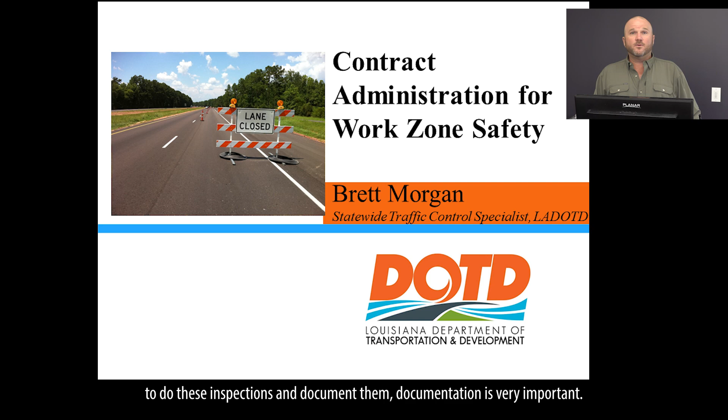So very important to do these inspections and document them. Documentation is very important. We're going to discuss that a little bit later on.

So as far as agenda today, we're going to define a few things in temporary traffic control, what some things are. We're going to talk about specifications. None of this stuff has been made to be memorized. There's specifications written for temporary traffic control. We have our standard specifications manual. We have temporary traffic control standards. We have project specific plans. We have to verify that we're using the correct plan and the correct specification and apply that to our job site.

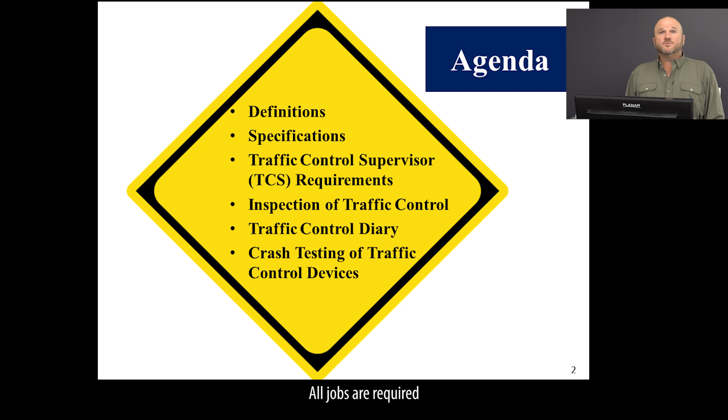All jobs are required to have a traffic control supervisor provided by the contractor. It is their duty to inspect these projects and make them safer and to make sure that they're in compliance with the traffic control plan. So we'll go through the requirements of those, and then we'll get into the inspection of temporary traffic control.

What to look for when you do inspections, morning, afternoon. We have to do inspections at night. We have to do inspections under adverse environmental conditions such as rain and fog, things of that nature.

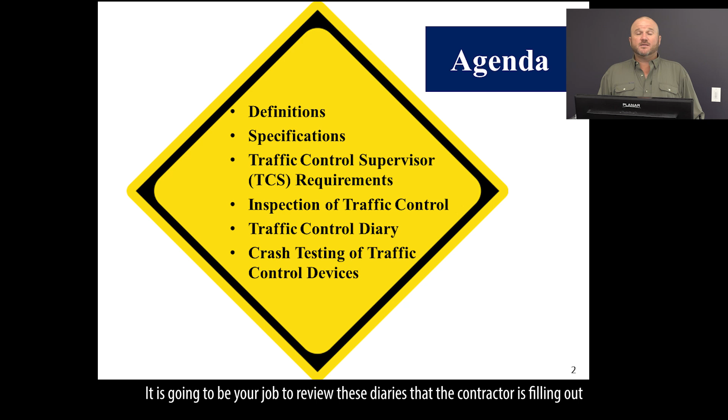So we'll go through that, and then we'll discuss the traffic control diaries. These are very important because when we're involved in litigation, these are usually the first thing that the plaintiff's attorneys are going to subpoena. They're going to go through our traffic control diaries and verify that we're filling them out correctly and accurately. It is going to be your job to review these diaries that the contractor is filling out and verify that they have the correct information on there.

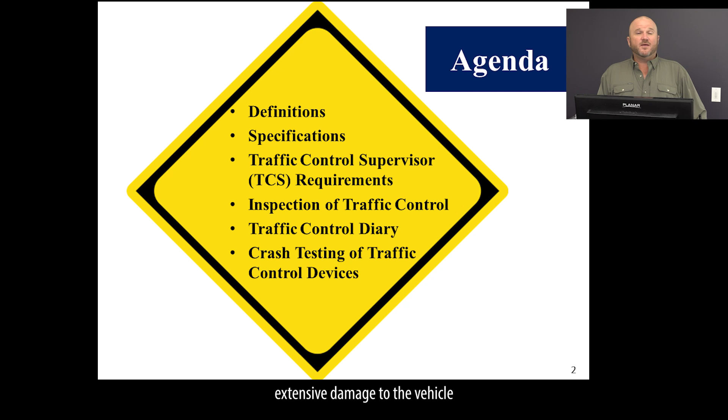And then crash testing of traffic control devices. Every device that we're using out there on the road has to be crash tested. And what that means is it has to pass this level of crash worthiness, and it's called MASH, the Manual for Assessing Safety Hardware. And what that does is verify that if someone runs off the road or hits one of our devices, that it will yield or break away and not cause extensive damage to the vehicle, and will not allow debris or detachable parts to go into the passenger compartment of the vehicle.

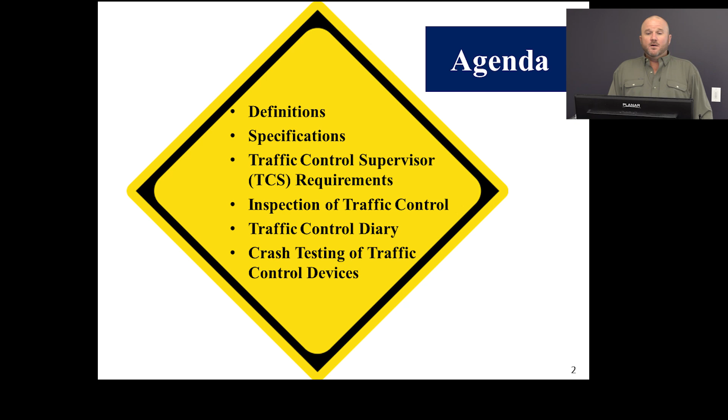Why is highway work zone safety important? First thing, we want to ensure we have a safe environment. When we say safe environment, it's something that you have to get used to, because when we discuss that, first thing that comes to mind is motorists. But it's not just motorists out there that we're looking out for. We have pedestrians, we have motorcyclists, bicyclists, and one of my most important things to me is our workers that are out there. They're out there vulnerable, they have a job to do, they can't keep their eyes on traffic all the time, so they are depending and relying on temporary traffic control for their safety.

All right. We also want to prevent crashes. We have serious crashes. We have fender benders. We have just minor incidents. All of those things are recipes for disaster. They will get us involved in litigation. In the worst case scenario, we have a fatality, and that's what we're trying to prevent.

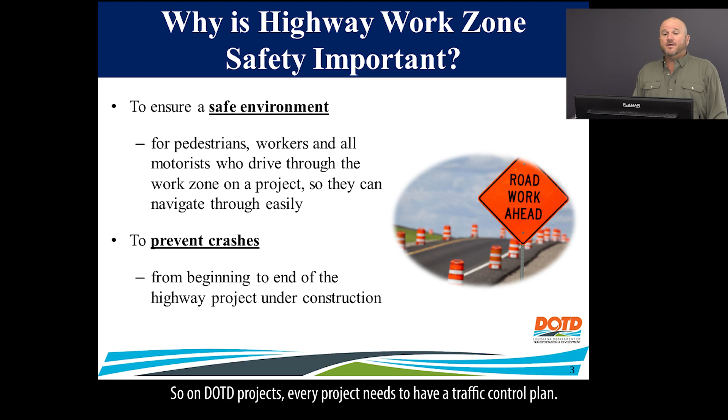On DOTD projects, every project needs to have a traffic control plan. It can be something very basic that comes from the MUTCD, the Manual on Uniform Traffic Control Devices, which is our federal minimum specifications. Or it could be a project-specific plan, which means it's very detailed, drawn to scale, with street names and station numbers and all kinds of things that make this plan specific to this unique project in this particular part of the roadway.

In between those two, we have our temporary traffic control standards, which are not project specific. They're more detailed than the MUTCD requirements, but not quite as detailed as a project specific plan. It tells us where our signs go, where our channelizing devices and portable concrete barrier go, if we're using that. All of that is laid out in the traffic control plan, and we need to make sure we're following that plan. If something happens and we're involved in litigation, and we're not following our traffic control plan, we don't have a leg to stand on to fight that in court. We can't defend that. So we need to try our best to follow that plan as closely as we can so we can defend what we have out there on the roadway.

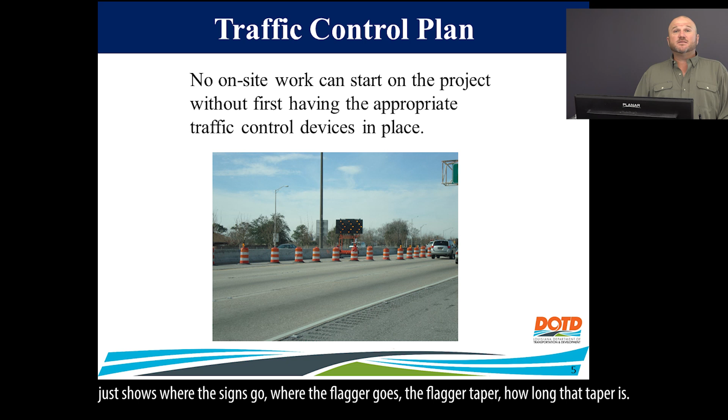No traffic control should start until we have an approved traffic control plan for that project. It could be something as simple as the traffic control standards. If we're doing a basic overlay, you're going to use a standard sheet for the paving, TTC 04. It just shows where the signs go, where the flagger goes, the flagger taper, how long that taper is, and then the actual workspace. We need to make sure we're using that plan and it has been approved, and we've got approval from DOTD before we start installing our traffic control devices.

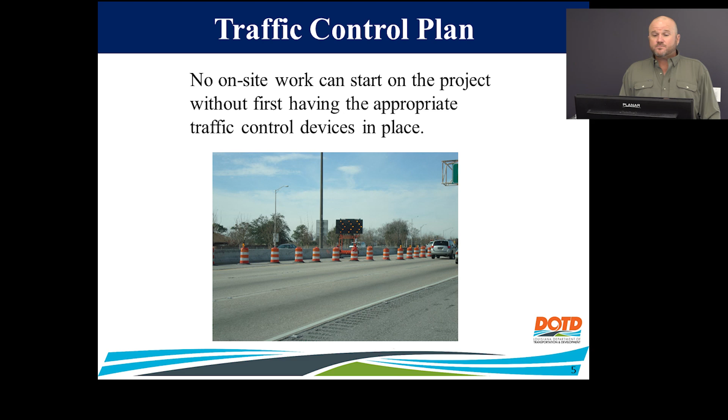The MUTCD, the Manual on Uniform Traffic Control Devices, is our federal minimum. We have to follow this as a minimum, or we're going to get federal dollars withheld from us. We don't want to do that. For instance, the MUTCD calls for an arrow board to be used anytime we close a lane on a freeway. Louisiana goes above and beyond that and says anytime we close a lane on a multi-lane roadway - divided, undivided, freeway, whatever - we're required to use an arrow board for that lane closure, and that arrow board has to be a type C. So we can go above and beyond the MUTCD, but we can't fall below that standard.

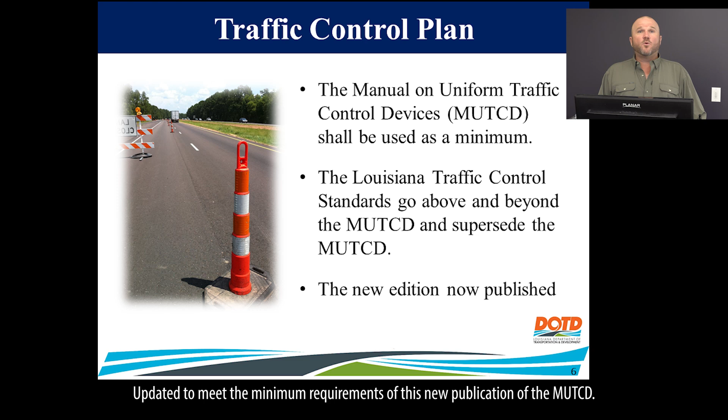We do have a new edition of the MUTCD called the 11th edition. It was published in December of '23. Each state has 2 years to get into compliance, so by December of this year we have to be in compliance with this new MUTCD. The previous one was the 2009 edition. So we're on track to get our traffic control standards and our specifications updated to meet the minimum requirements of this new publication of the MUTCD.

Going through the traffic control plan, theoretically what needs to happen is the contractor bids on the job, they get the job, and they should review the traffic control plan, verifying there's no issues or foreseeable problems. If they do find issues, those need to be addressed at the pre-construction meeting. I go to a lot of pre-construction meetings, and a lot of times temporary traffic control gets overlooked - they just don't take it as seriously. But that contractor needs to go over that plan, review it, take it out to the field, and verify that the plan fits or works where they need it to. If it's not, that needs to be discussed at the pre-construction meeting to get a resolution.

The main reason that's important is because it's a lot safer and easier to take care of those problems in the office instead of out there in the field. You get half of your traffic control installed, and then you run into a problem, and now you're not really sure what to do, with traffic passing by you going 50, 60, 80 miles an hour - so it makes it dangerous.

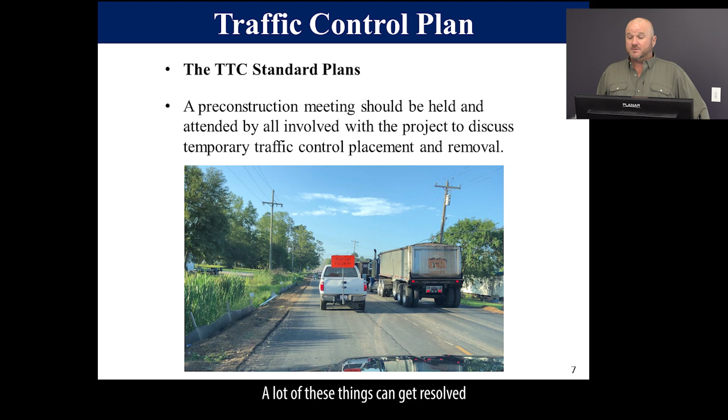A lot of these things can get resolved before heading out into the field.

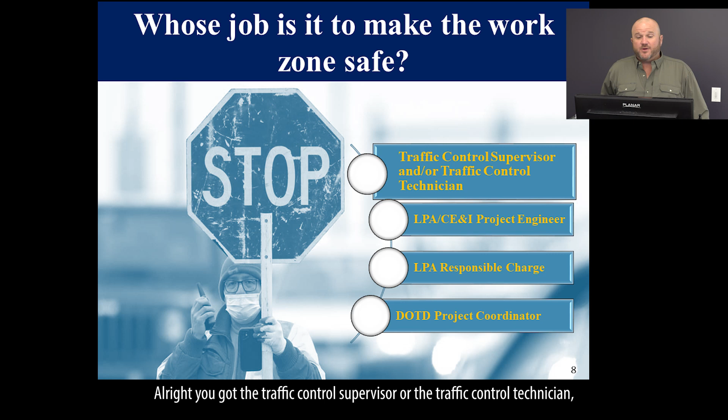So whose job is it to make the work zone safer? You've got the traffic control supervisor or the traffic control technician, the LPA or the CE&I project engineer, the LPA responsible charge, and the DOTD project coordinator. And the answer is all of them. It's everyone's job to review that.

We have a little problem with DOTD as far as inspection goes. The project engineers and inspectors out on the job, some of them think it's the contractor's ultimate responsibility. They are responsible for temporary traffic control, but if we see something incorrect, we need to make a note to the contractor so they get that corrected as soon as possible.

So to define a few things, first we're going to discuss the Louisiana traffic control technician course. This is a one-day course, and it's a prerequisite to be a traffic control supervisor. We go through the basic standards of temporary traffic control.

We start at just cones, drums, and signs. When we start discussing this, if we have students in class who haven't taken the actual training before, they think a sign is a sign. But there are different classifications of signs - we have guide signs, warning signs, and regulatory signs, and they all mean different things. So we go through the different meanings of them.

Channelizing devices, we go through them as well - when we could use cones, when we have to use drums, if we're using barricade warning lights, when we use those. And then finally, we get into the setup, installation, removal, and maintenance of a basic flagging operation and a standard lane closure on a multi-lane roadway.

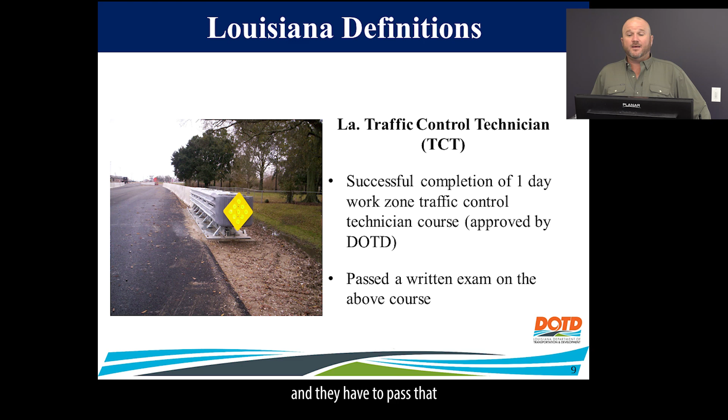At the end of the course, they have to take an exam - 50 multiple choice questions - and they have to pass that in order to move on to the traffic control supervisor course, which is an additional 2-day course. Technician is a prerequisite; they have to take it and pass it before they move on to supervisor.

We get more in depth into more complex traffic control schemes, such as closing lanes on limited access roadways. We may have to close ramps, we may have to close the entire road. So we go through all those steps to handle those more complex traffic control scenarios.

We also get into litigation - what happens if you're involved in a lawsuit. A lot of guys and gals out on the roadway, a lawyer will come out on the job site and start asking questions about a crash that happened there. We go through the steps involved with that.

The first thing you do is go to your supervisor. Your construction company has an actual lawyer, and the insurance company will have a lawyer. So we go through all the steps and define what litigation is, what discovery is, interrogatories, depositions, and your responsibility and role as a traffic control supervisor if you're involved in those.

There's another written exam at the end - 50 multiple choice questions - and you have to pass that.

According to our 2016 standard spec books, in order for a contractor to have a traffic control supervisor on that project, they have to have 1 year of field experience in work zone temporary traffic control. That's another thing contractors miss when they put in traffic control supervisors out there - we have supervisors on projects who really only have a couple months of experience. They took all the classes, but they don't have that experience, and we need to verify they have it before they start doing traffic control supervisor duties on our project.

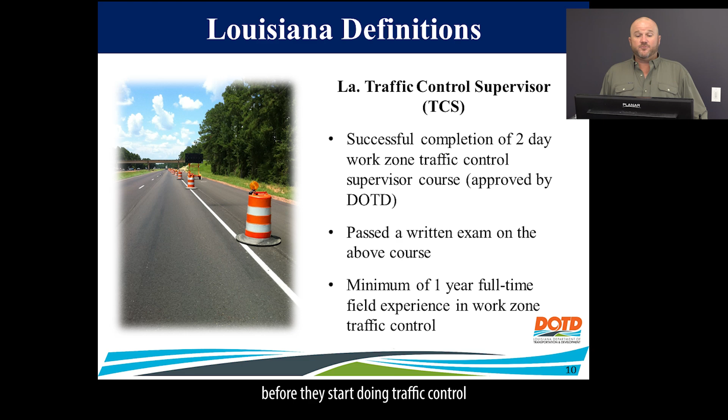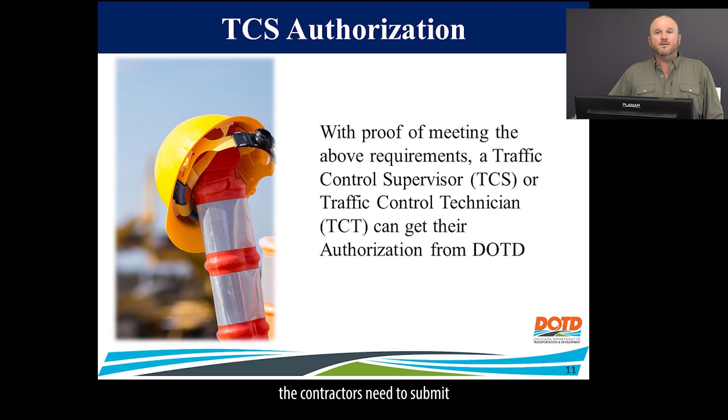The way it kind of goes down is AGC offers a traffic control technician and traffic control supervisor course monthly, and contractors send guys and gals to this course. After the course is complete, they get a certificate of completion issued by ATSSA and AGC. At the pre-construction meeting, the contractors need to submit these certificates of completion to the project engineer or the LPA CE&I charge to verify that whoever is out there inspecting traffic control has had the proper training.

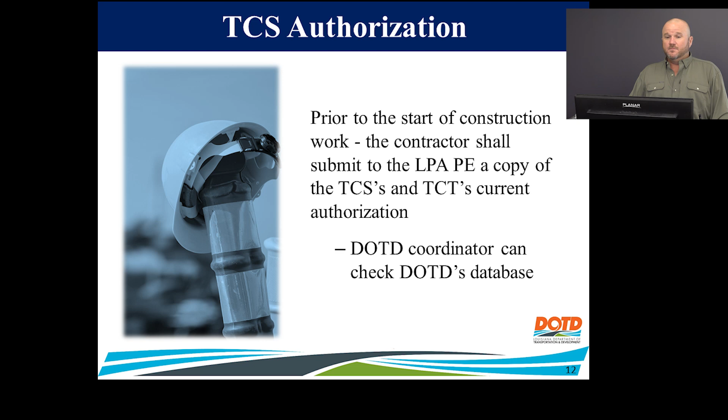So, questions. The traffic control supervisor works for the local public agency - is that true or false? The answer is false. The traffic control supervisor actually works for the contractor.

Now, the LPA agency should have traffic control supervisors out there on the project. They are required to have traffic control supervisors out there as well, but the contractor's traffic control supervisor is responsible for the traffic control on the job.

The next question: the traffic control technician has to pass a written exam after taking the work zone traffic control technician course. The answer is true. There is a written exam for every class we do in temporary traffic control - flagger, traffic control technician, and traffic control supervisor.

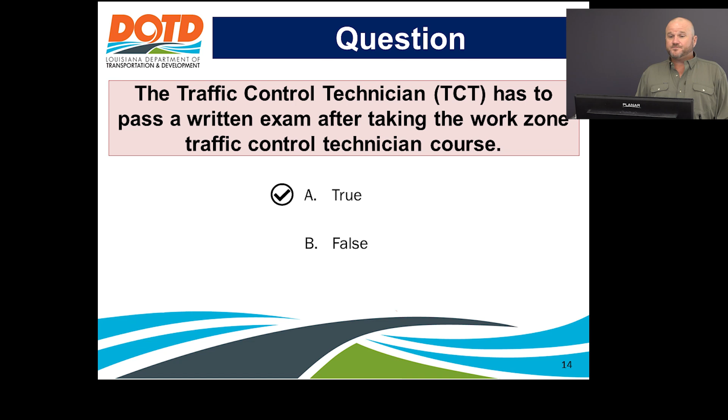Requirements for work zones. We have to follow these specifications. Our 2016 standard specifications, or the Purple Book, has our temporary traffic control standards. Temporary traffic control is in section 713 of the Purple Book.

Signs and pavement markings are found in 1015, and they will reference you to different parts of the manual as well. For instance, if you're trying to figure out what kind of sheeting goes on the signs - signs are in temporary traffic control, section 713 - it will refer you to a couple other sections, 729 and 1015, to verify that you're supposed to be using type 3 high intensity prismatic sheeting for all signs, and if they're orange, they have to be type 10, diamond grade, or crystal grade.

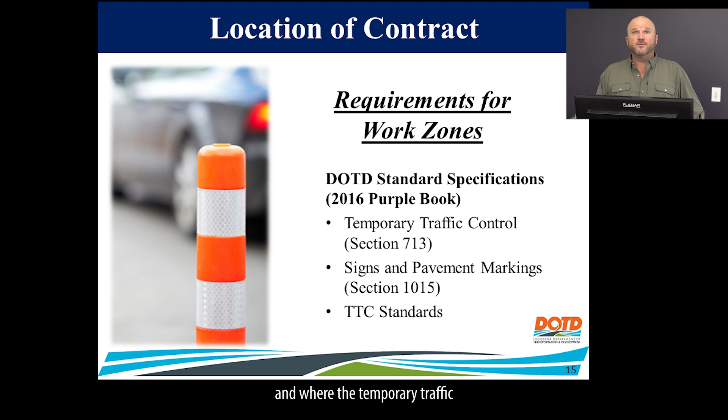So we find all that inside our standard specification book. You need to be familiar with that book and where temporary traffic control is in it.

The traffic control supervisor has to have several things when they're on the project. They should have a set of all current contract documents, they should have a contract, they should have traffic control standards, and they should have a copy of the MUTCD.

All of these documents are given to the traffic control supervisors when they take the course. They get a copy of the MUTCD, Louisiana traffic control standards, and a copy of the quality guidelines for traffic control devices.

That is a document published by ATSSA, and it has pictures and comparison charts. It shows you what's acceptable, marginal, and rejectable in our temporary traffic control devices.

For instance, it'll give you a picture of a cone that's in good shape - it's acceptable. They'll have a picture of another cone that's in terrible shape, and it's rejectable. Then they'll have another picture of one that's in pretty good shape, and it's marginal, meaning you need to start making plans to get that device replaced pretty quick.

So they get all that information, all those documents, at the traffic control supervisor course. The traffic control supervisor duties: provide traffic control management and supervision services at the project site.

So traffic control supervisors can have multiple duties, and most of them do. Contractors send a lot of people to class just because they are required to have a traffic control supervisor or technician in some cases on the project during all working hours. So they'll send equipment operators, superintendents, and people that do all kinds of different jobs, but they're out there on site so they're covered in the contract.

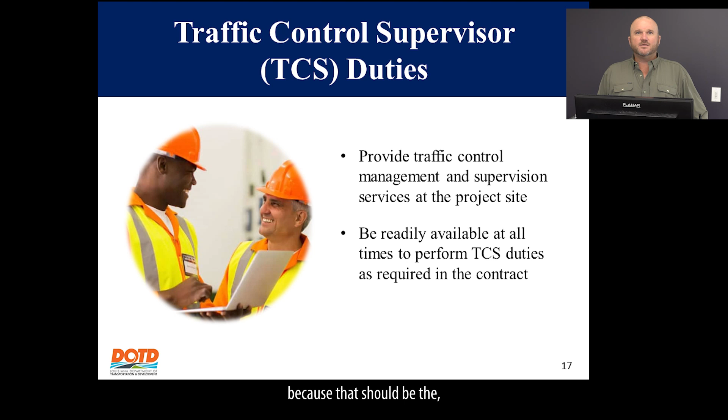They need to be readily available at all times to perform the TCS duties as required by the contract. So significant projects - interstates, multi-lane high-speed roadways with a high ADT - are required to have a traffic control supervisor on site during all working hours.

On insignificant projects - rural jobs, or maybe some low ADT, low speed projects - they can delegate the inspections to a traffic control technician, but they need to be within a reasonable driving distance in case something happens on the job site, so they could get there.

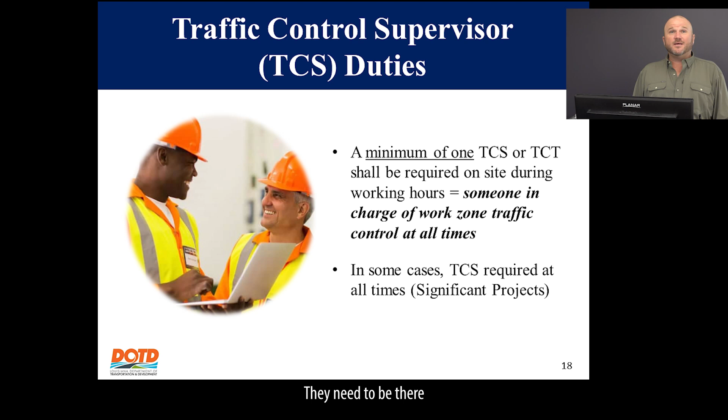There's not really much of a time frame set in there, so I usually say if they're within an hour, they need to be there within an hour to correct any problems that may come up on the job, or if there's an incident or a crash, they need to be there to document everything.

In some cases, like significant projects, the traffic control supervisor is not allowed to leave the project as long as work is going on. It does not matter if they're working in the travel lane, outside the shoulder, on the shoulder, or in the median - if they're working on site, they have to be there.

One of the biggest problems that we have with work zone traffic control is flaggers. We are required to have certified flaggers out on the project site. A lot of times that does not happen. They have not had the proper training. As a traffic control supervisor, it is their responsibility to make sure that the flaggers they have have been trained properly and have the right equipment to do the job, such as 6-foot stop/slow paddles, fluorescent yellow-green vests, and make sure they're not standing in the roadway.

It's a big responsibility for flaggers, because that job is super dangerous. The traveling public, when they're driving down the road, a flagger is typically the first human they encounter out there on the roadway. So it's dangerous, they're not very visible, there's not a lot drawing attention to them. As a traffic control supervisor, they need to verify that that flagger is visible for at least 500 feet.

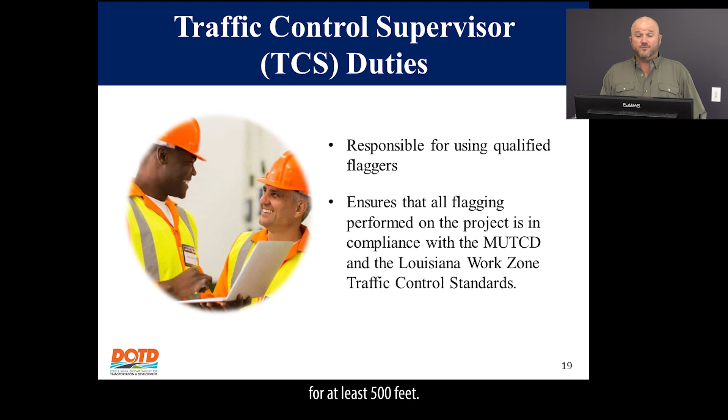Some things of what not to do. We do a lot of flagger training, and that's some things we cover. We go through about 2 hours worth of safety stuff - talking on the phone, having earbuds in, not paying attention, having no escape route. All of those things are bad for flaggers. It makes it very dangerous for them.

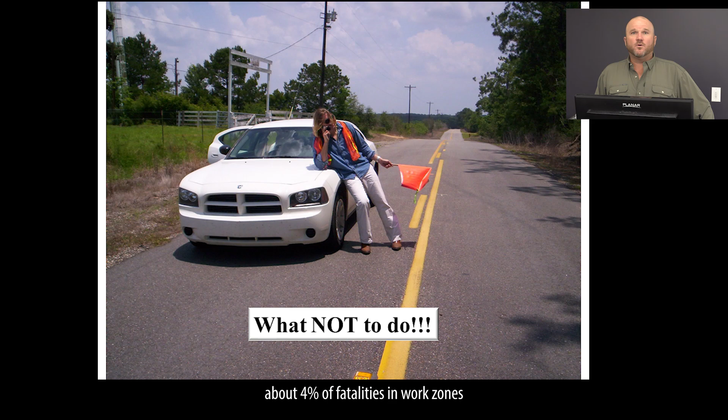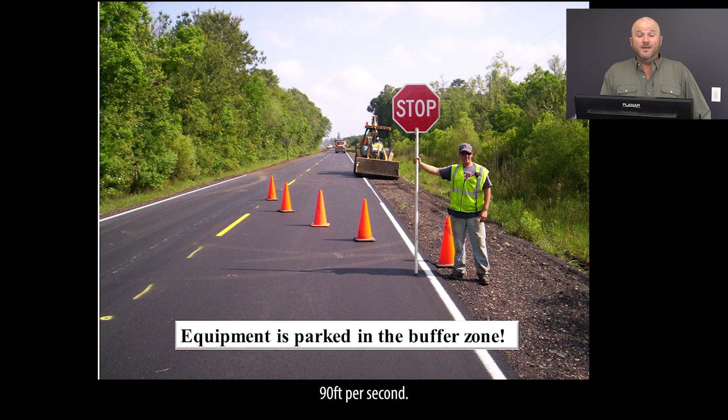You can see the equipment back there in the background parked in the buffer space. They could have workers there, and there's a vehicle coming toward them at 90 feet per second, and the driver has no control of that vehicle. That's the purpose of the buffer space - it is a recovery space. If someone runs through that taper, they have enough room to come to a stop before hitting a piece of equipment or one of our workers.

In that case, we are required in most situations to have that minimum longitudinal buffer space. It is according to speed, and we'll go through that in just a little while.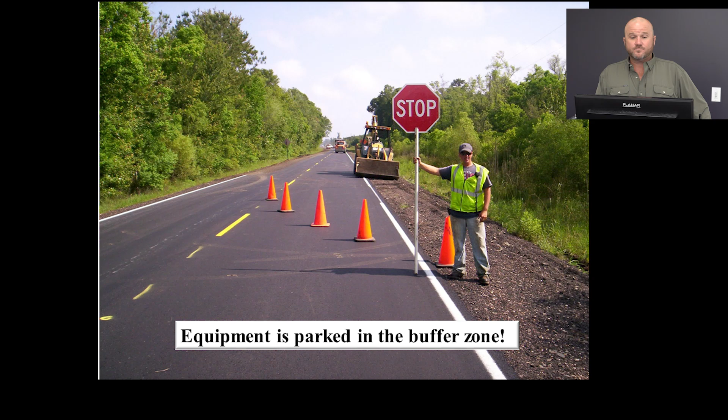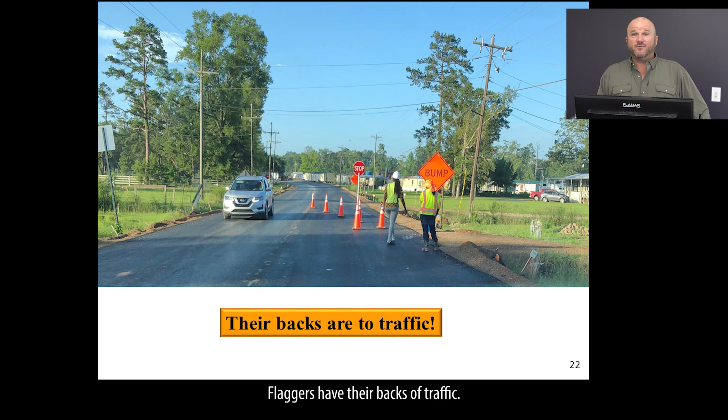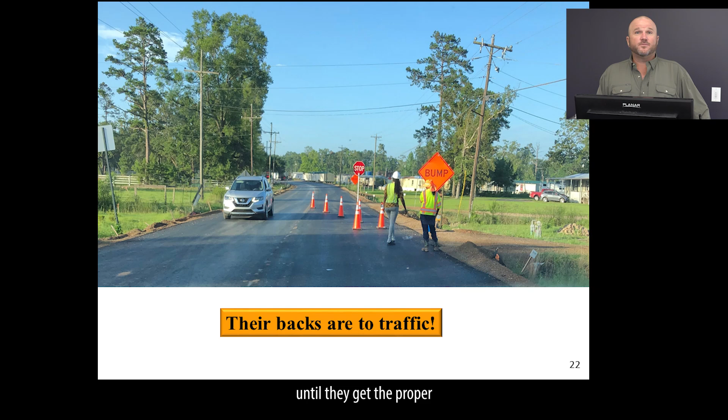Flaggers not paying attention. Flaggers shouldn't have other workers congregating around their work area - it's a distraction to them. We got our stop/slow paddle just stuck in a cone in the middle of the lane. Flaggers have their backs to traffic. This is just bad. I actually took this picture and asked the flaggers if they had certification, and neither one of those flaggers had had any training whatsoever. So in that case, they've got to get out of the roadway until they get proper flaggers out there, and they can continue working that situation.

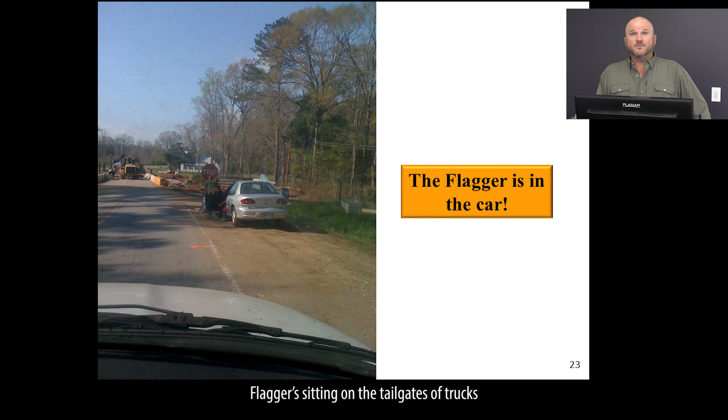This one here is pretty obvious. This happens quite a bit - flaggers sitting on tailgates of trucks or sitting in their cars, not paying attention. All it takes is one vehicle coming through and hitting that vehicle, and we have an injured or a fatality for our flagger.

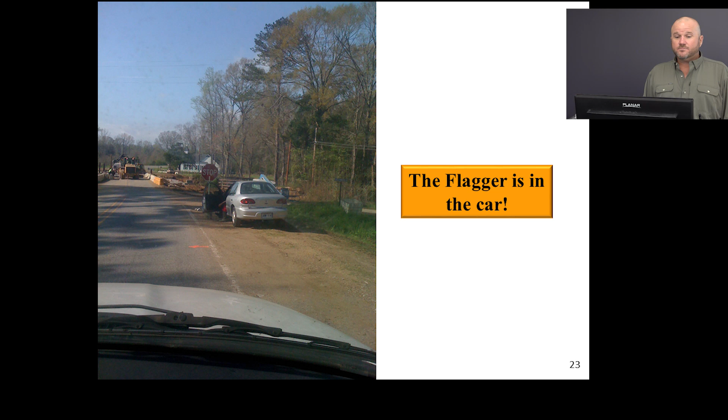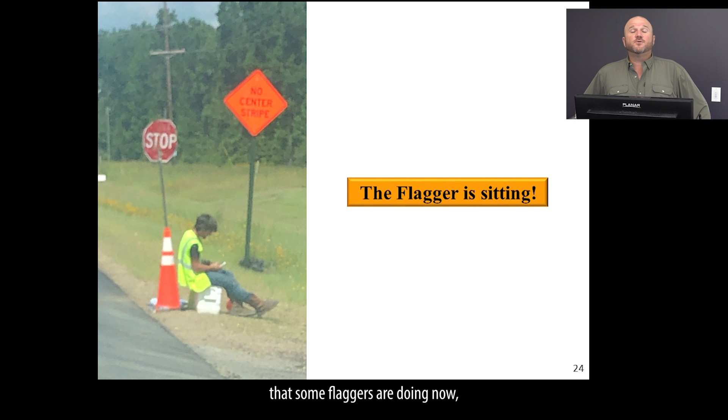One thing some flaggers are doing now - we do require two-way radios for our flaggers, but there's a lot of situations where flaggers are taking pictures of the final car coming through and sending it to the other flagger to verify. Gives a picture to that other flagger to know that is the last vehicle coming through, and they can release their traffic after that. So that is one thing that actually works pretty good.

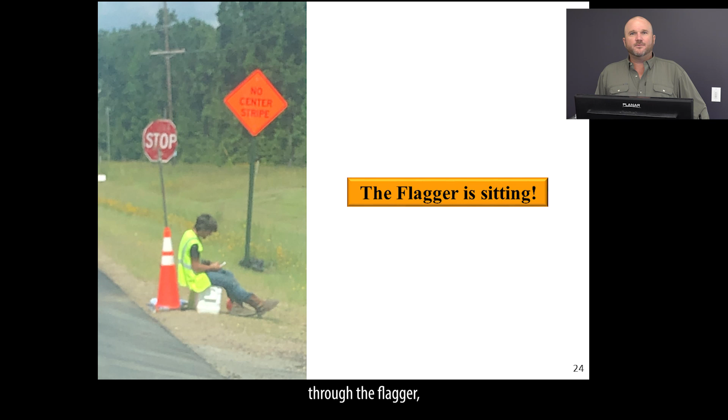The problem comes in when the traveling public goes through there and sees a flagger taking a picture of them - that can cause problems. So it has its good and its bad. We kind of try to discourage that though.

Law enforcement officers in our work zones, this is another thing that helps slow traffic down. Blue lights will slow traffic down. It brings attention to our work zones, and it makes everything safer for our traveling public as well.

We've increased the use of law enforcement officers in our work zones in the past couple years. So for instance, if we have an interstate project now, we're required to have a presence officer sitting at what we call the critical safety point. The critical safety point is a quarter of a mile before the taper if there's no queue backing up. If the queue is backing up, the officer stays a quarter of a mile before that queue. They don't sit at the queue.

So it's going to be a fluid operation. They may have to move up and down the shoulder to keep up with that queue. All we're doing is drawing attention to those stopped vehicles.

This is another thing that we have documented proof now that this kind of stuff works. We've increased the use of law enforcement officers, as well as what we have a queue detection system, which is devices that scan and monitor traffic speeds coming through our work zones. It sends messages to message boards. It'll say stop traffic 2 miles ahead or stop traffic 5 miles ahead. So what we're doing is letting the traveling public know that traffic is going to be stopped 2 or 5 miles ahead, and we have that law enforcement officer keeping up with the queue with that stopped traffic.

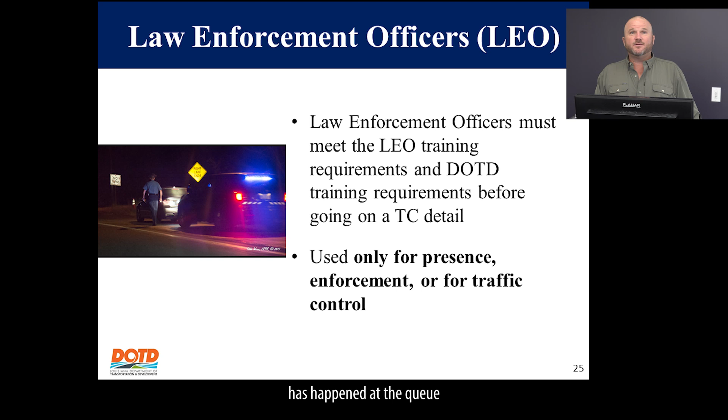Last year in 2024, we had something happen that has never happened before. We had 0 fatalities on the interstate at the queue for work zones. That's never happened before. Most of our fatalities on the roadway have happened at the queue. That is a vehicle at a high rate of speed running into the back of a vehicle at a low rate of speed, or a stopped vehicle. They're usually serious and cause fatalities. We had 0 of those. So that let us know that the use of law enforcement with queue detection systems is decreasing those fatalities on the roadway.

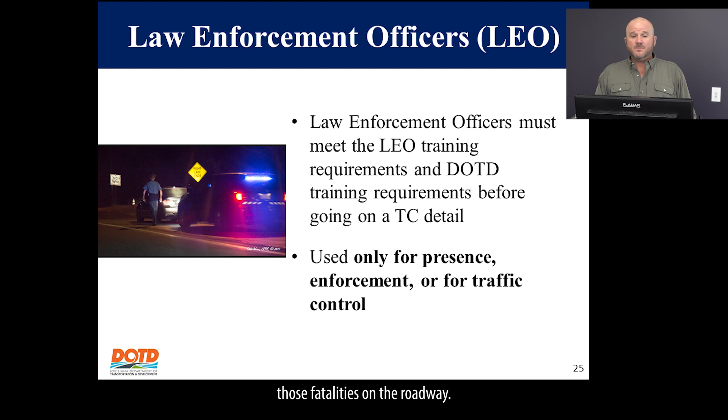Now, there's a couple things that law enforcement officers have to do. They have to take a work zone detail training course. It's a 1.5-hour course. I actually teach the course along with Ron Whitaker. He is a retired troop commander from Louisiana State Police.

We go through and tell these law enforcement officers when they're needed, when they're not needed, where they're effective, where they're not effective. And we go through all the different locations where they're supposed to be. They're never supposed to be parked in a taper. They need to be in the advanced warning area, or at the beginning of the queue, a quarter of a mile before the queue, or they could be in the actual work zone. If they're in the work zone, they should never be parked behind the truck mounted attenuator.

See this quite often as well. That truck mounted attenuator is there to protect the traveling public as well as the workers, and if someone runs through that work zone, they should hit the truck mounted attenuator first and not our law enforcement officer.

So we go through that, and after teaching a lot of these law enforcement officers, we've come to find out that these contractors are telling them to get in these dangerous locations, telling them to park by the taper, by the arrow board, and that's not where they're supposed to be. Telling them to pull up behind the TMA because the oncoming traffic cannot see the blue lights if they're in front of them. But there's a system to that, and they're supposed to offset.

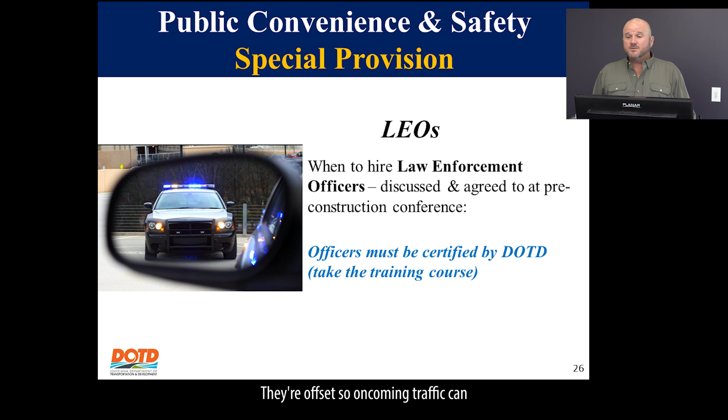They're supposed to be parked in front of that truck mounted attenuator and kind of hugging the right edge line, and the truck mounted attenuator is sitting in the middle of the lane. They're offset so oncoming traffic can see the blue lights.

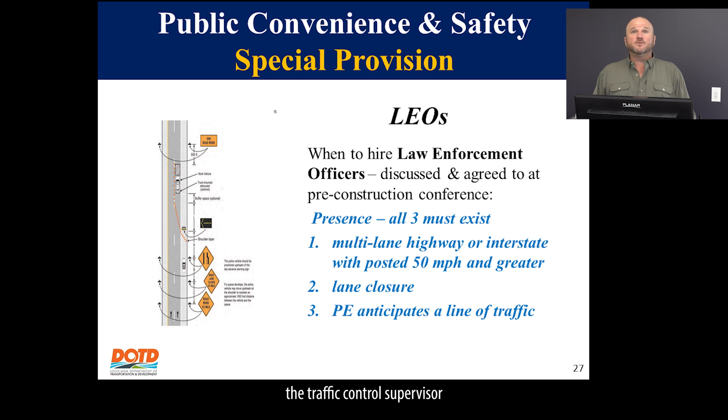Here's another one for the law enforcement presence, where you see them sitting on the shoulder of the road with their lights on. They're near the speed limit reduction sign, strategically placed about a quarter of a mile before the taper. So if you ride out to one of your project sites and the law enforcement officer is sitting at the arrow board or in the buffer space or anywhere where they're not supposed to be, you need to make note of that and contact the traffic control supervisor and tell them they need to move.

We also have an enforcement detail where we pay law enforcement officers to go out and write tickets on the job site. This doesn't happen very often. It can happen a lot more. It should happen a lot more. Just writing tickets at sporadic times lets the traveling public know we're not just sitting there with blue lights on.

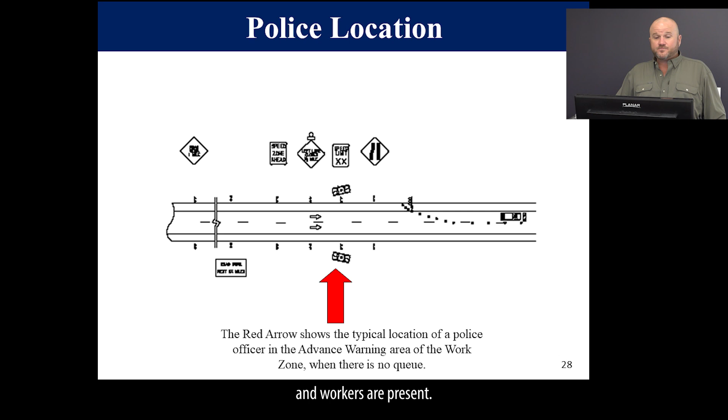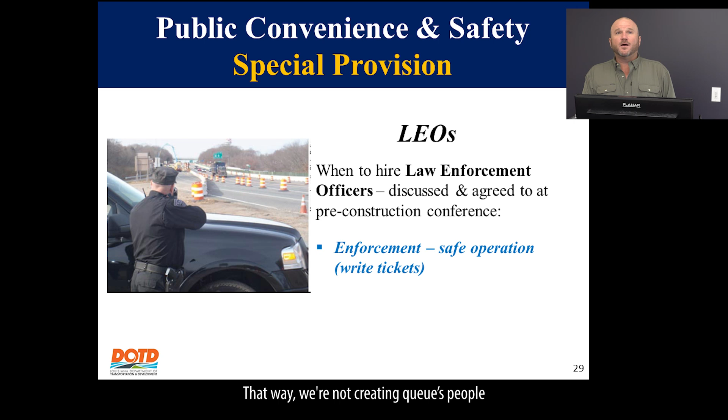We are actually issuing citations, writing speeding tickets, and those tickets are higher when drivers get caught and workers are present. We also discuss in these classes that when they're doing enforcement, they're not allowed to park in the actual work zone and pull people over there. They can radar from the work zone, but they can't pull anybody over until past the termination area, past the work zone. That way we're not creating queues, people slowing down and causing heavy braking near our work zone. There's a process to that, and we go through it with them pretty extensively.

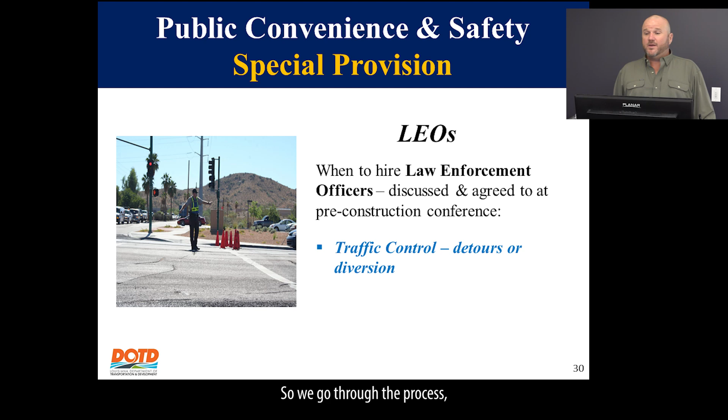For traffic control, if we have to close the road, or have detours or diversions, we may use law enforcement officers for that. We also use them for incidents. If we have an incident on a roadway, we may not have enough time to set up proper traffic control. For instance, if we have a crash in the work zone that blocks all the through lanes, we may have law enforcement forcing traffic off an exit before they get to it. We won't have signs up - we don't have time, we have to act now, act quick to get traffic moved to try to prevent secondary crashes. We go through the process of all that as well.

Question: a law enforcement officer must be trained in a DOTD training course before working a detail as a presence officer.

That answer is true. They must attend the course - they actually attend the course. We get a roster with their name, their agency, and their badge number, and it goes into a DOTD database.

You have access to this DOTD database. You can email me - my email address will be up at the end of this presentation - if you're having trouble getting access to it. But if you're reimbursing law enforcement for their services on our job site, you need to verify that they've been trained. You do that by going to the DOTD database and verifying that their name, badge number, and agency are in there and that they have not expired. That certification is good for 4 years - they have to retake the course every 4 years.

Duties as a traffic control supervisor: they coordinate all traffic control operations. The prime contractor is responsible for all subcontractors, utility companies, and any suppliers that may be on the project. For instance, if you have a supplier bringing concrete piling out to the job site, that truck driver has no idea where they're supposed to park legally and by contract requirements to be in a safe location.

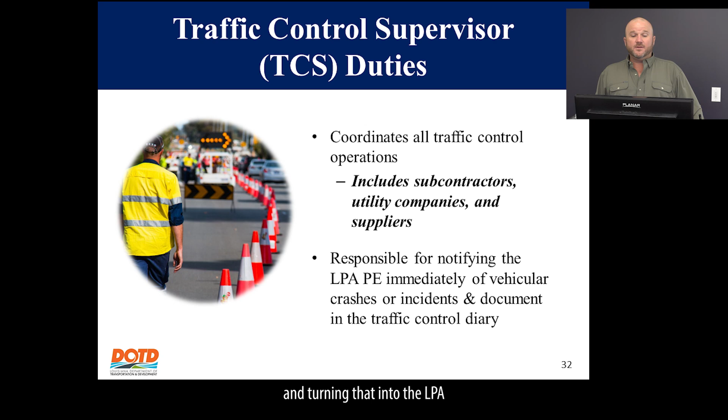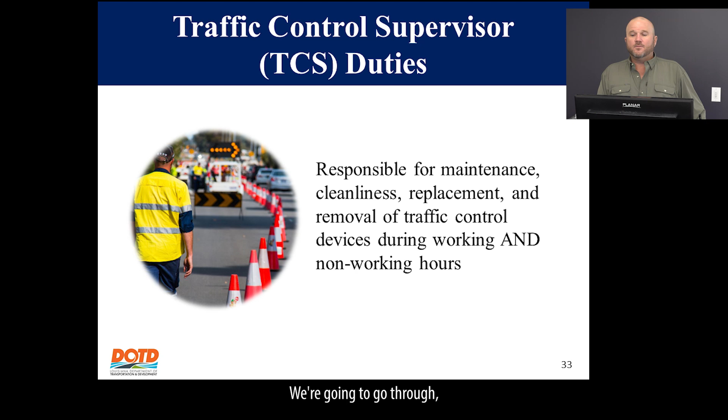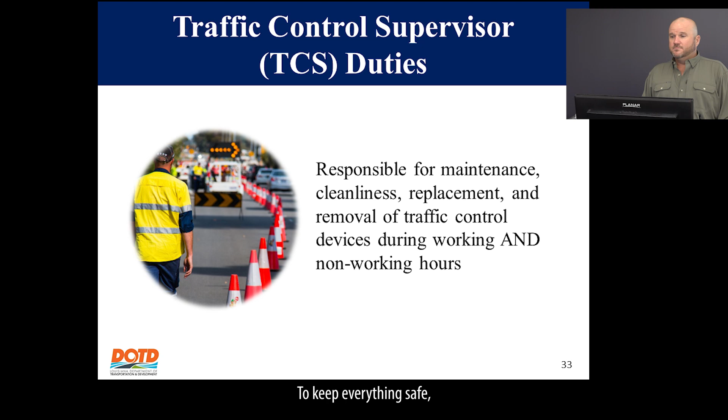The traffic control supervisor is also responsible, if there's any incidents or crashes, for noting that in the diary and turning it in to the LPA project engineer immediately. They are also responsible for the maintenance, cleanliness, replacement, and removal of traffic control devices during work and non-work hours. We're going to go through inspections here shortly and discuss when they're supposed to inspect. But even when they're not working and they have traffic control devices on the project, they are required to still do a daily inspection to verify that signs are still up, devices are still there, and haven't been blown down, to keep everything safe.

They also have to ensure that workers are wearing the proper PPE. Flaggers are required to wear Class 2 vests in the daytime, Class 3 at night, and they're also required to wear the fluorescent yellow, lime green vest for flaggers. Other workers can wear orange if they want, but flaggers are required to wear the lime green.

Traffic control supervisor is also responsible for the inspection of all traffic control devices every single calendar day, holidays, weekends, every single day, even if they're not working. They can delegate that inspection to a TCT, but they need to note that in their diary. When they fill out their diary for their traffic control, they need to put in the remarks that they did not do the inspection that day, that it was delegated to a traffic control technician, and that name should be in the diary.

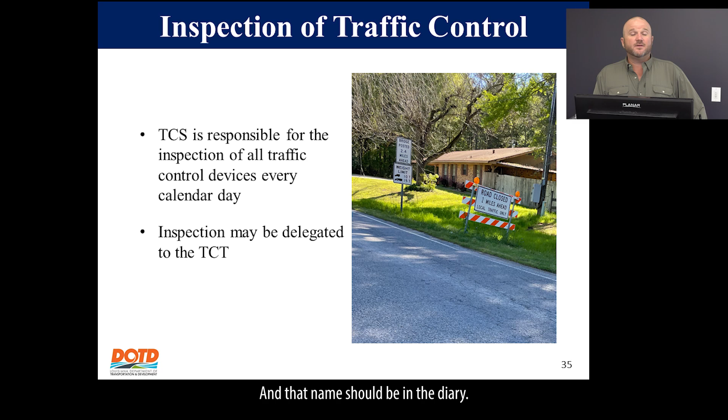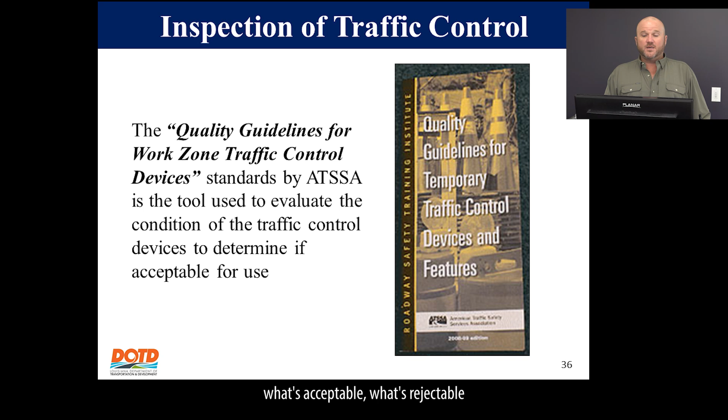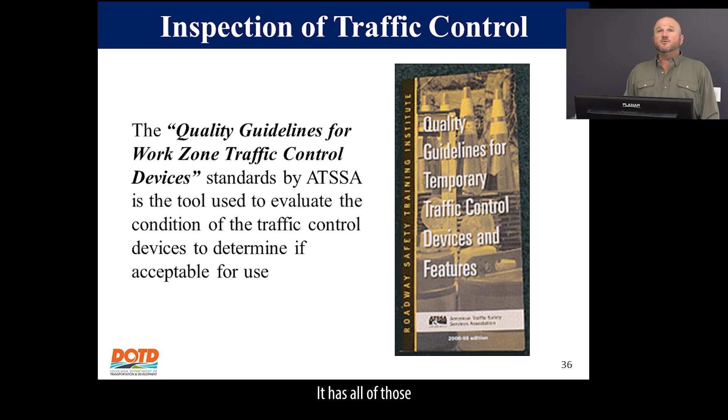This is the pamphlet I was talking about earlier, the quality guidelines for temporary traffic control devices and features. This is just our comparison chart, and it tells you what's acceptable, what's rejectable, and what's marginal. It covers cones, drums, vests, arrow boards, portable changeable message signs. It has all of those traffic control devices in there, and you should be using this. If you've taken traffic control supervisor, you've gotten this pamphlet in your packet.

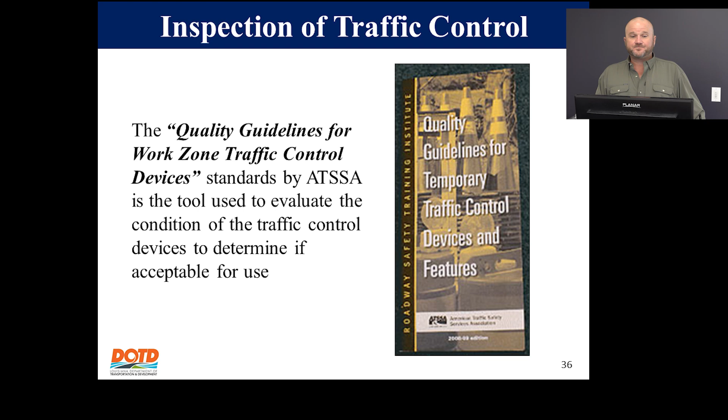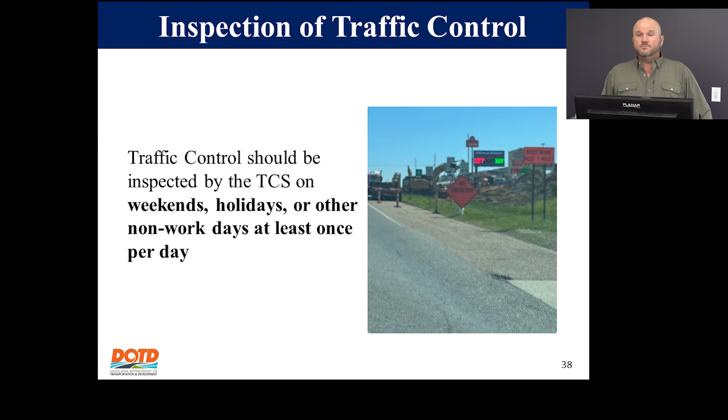Traffic control should be inspected by the TCS on every weekend, holiday, or other non-work day at least once a day. They could go out there at any time, morning, afternoon, midday, but they have to drive through there at least once a day, do an inspection, and document that inspection into our Site Manager system.

Traffic control supervisor needs to do an inspection at least once a week at night, and the first night that any changes have been made in temporary traffic control. They're verifying that the lights are working and the retroreflective sheeting is operating like it's supposed to. If you do this long enough, you'll see that a lot of times that retroreflective sheeting looks good in the daytime, but you drive through it at night and it's dead. It can have some sort of film on it, or it could just be old, which makes it look good in the daytime, but at night it's not retroreflecting that light back to the source like it's supposed to.

Our traffic control diaries - the TCS has to maintain this traffic control diary in the DOTD traffic control logbook app. They log in when they take the traffic control supervisor course, get a certificate, and that certificate goes to DOTD. They get a user ID and a temporary password to log into Site Manager. They could change that password, and then they have access to every project that their company is the prime contractor for. For instance, if contractor ABC has 9 jobs going on active with DOTD, that one TCS will have access to all 9 of those projects. They can do traffic control on any one of them.

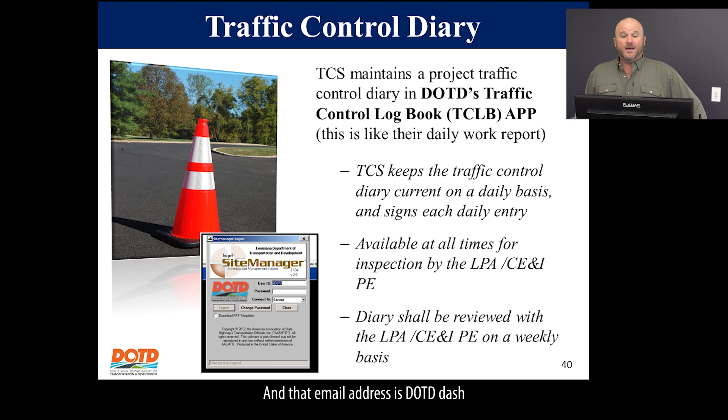If there's a problem with that, they should be emailing - I think it's on the next slide - but there's an email address that all of the traffic control supervisors have been given. If they have any issues with logging in, issues with their diary, completing them, not saving them, whatever that may be, that email address is dotd-smadm@la.gov. I'll leave this up here for a second in case anyone wants to take a picture of this or write this down. You as an LPA project engineer, you're going to have to log into this to review the diaries in Site Manager. If you have issues, this is the email address. This goes to about 5 different people. They do a really good job of answering very quickly. Most of our situations are handled within a couple hours of submitting that email.

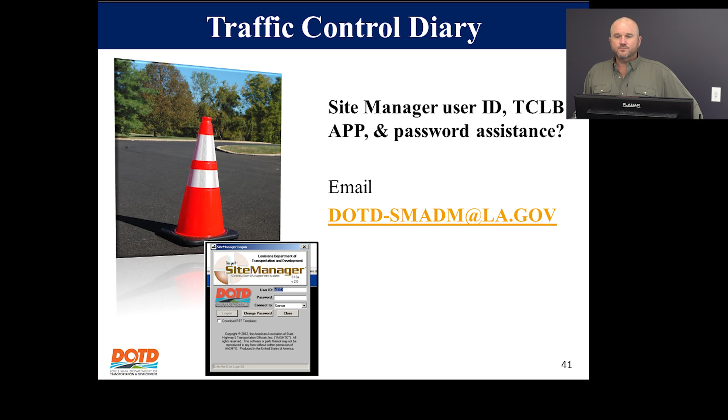Any and all deficiencies noted in the traffic control diary shall also be noted in the contractor diary. That being said, there's been some misconception in the past where I will pull up a contract and pull 50 diaries from that contract, and all 50 of those diaries said that the traffic control was good every single day. We all know that signs get knocked over, cones get knocked over, things get dirty, we have incidents on the job site, and those have not been noted in there. A lot of the traffic control supervisors are telling me, well, I did have problems on the job, but I corrected them, I stood the signs back up, and then I just made my diary say that everything was corrected when I left.

That's not the intent. The intent is when you do your inspection and you see that signs are knocked down, you note that in your diary: I've done an inspection at 10:15 a.m., I had 2 signs knocked down for my flagging operation, and I stood them back up. That's what they need to do.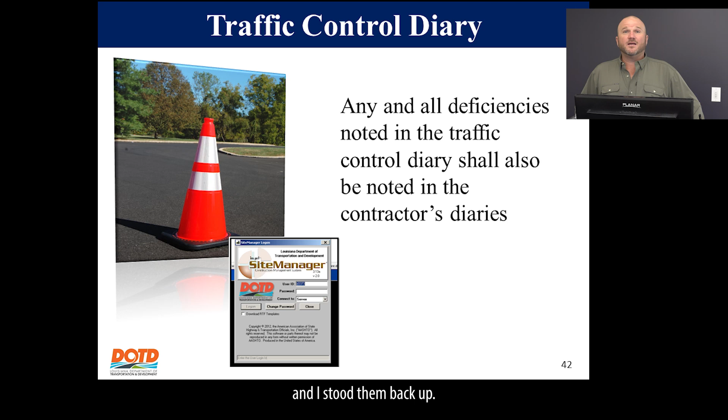They could be brief, but what happens is if there's an incident and a plaintiff's attorney subpoenas all these diaries, they're going to bring it before the jury and say, I got 200 diaries right here, and every one of them says that everything was perfect every single day.

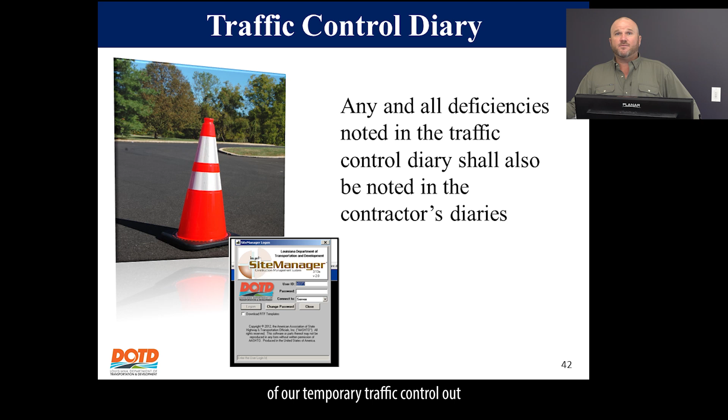Do you really believe that this traffic control supervisor was doing the inspection like they were supposed to? Because we've all driven through construction sites and we've all seen dirty signs, signs knocked down, and devices knocked down, but none of that is noted. So our traffic control supervisor in charge of our temporary traffic control out there is not doing their duty and filling this diary out the correct way.

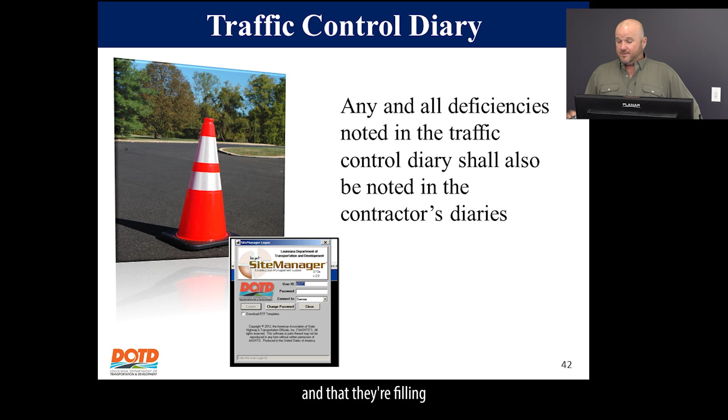And they use that against us. So make sure you verify that you're reviewing these diaries and that they're filling them out correctly. If they falsify them, they could be brought on other charges. This is falsifying a public record, which is against the law. And a lot of times, if there's litigation involved, that's another thing that they seek out.

Those plaintiff's attorneys are showing the jury that you were incompetent in filling this out. You said everything was correct, and I have pictures right here of barricades that are knocked down. The grass is dead underneath them, which lets us believe that barricade has been down for days, if not weeks, and none of these reports are reflecting that.

All right, so if they're filling them out incorrectly, they need to be charged $150 a day. If they're not filling them out at all, they get charged $150 a day for not having a diary.

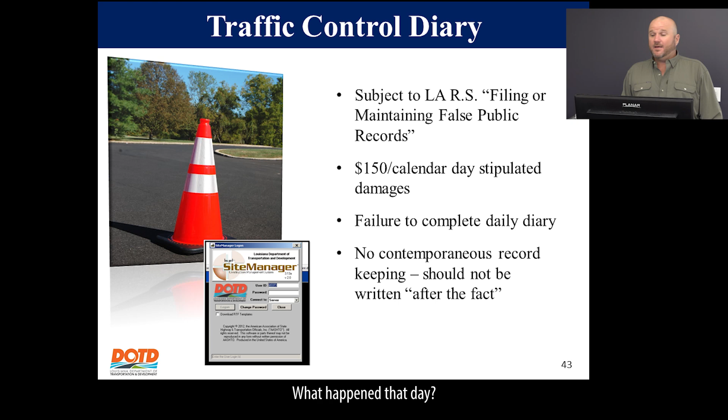What should be noted in that diary? What happened that day? There's a format on there. They have different operations, whether they're doing asphalt, paving, driveways, turnouts, concrete work, soil cement. They have to check each thing that they're doing. They also have to check what traffic control plan they're using, whether it's the Louisiana traffic control standards, or if it's a specific sheet in the actual contract where we have a project specific plan.

If everything was corrected, when was the last time these devices were cleaned - the more they fill out, the better off they are. The problem is a lot of times these are filled out at the end of the day when the traffic control supervisor and everyone is ready to go home, and they just fill it out as quickly as possible and leave a lot of information out. So if you see that in your inspection of these diaries, make note to the traffic control supervisor: you need to fill these out completely or I'm going to start charging you $150 a day for these incomplete diaries.

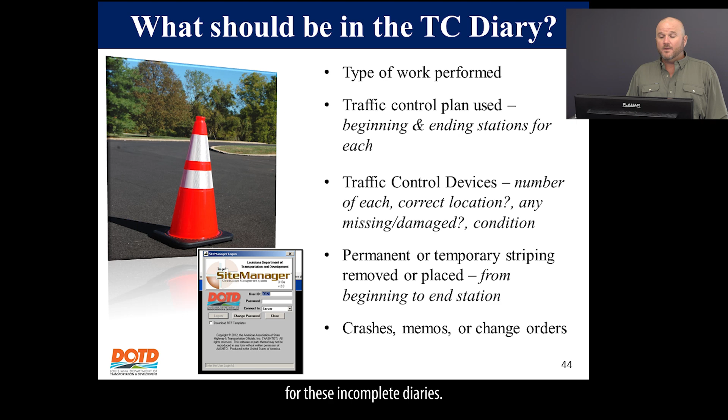As an LPA CE&I project engineer, you can suspend all or part of the work operations that are going on. If you're having issues on the job site like missing signs, flaggers not doing what they're supposed to be doing, give them a warning. Tell the traffic control supervisor. If it continues to happen, you could shut that project down until we have a safety meeting and discuss how important safety and traffic control is, and then they could go back to work after that. But you should not let them continue to work with dangerous conditions for the workers, the traveling public, which is motorists, pedestrians, bicyclists, and motorcyclists.

If you have uneven pavement, this is another one that I run into a lot. If you have uneven pavement out on the roadway, that is very dangerous for motorcyclists. They have to have uneven pavement signs up at the beginning of that uneven pavement and periodically through it to let the motorcyclists know that if they're going to swap lanes, they're going to have a drop off there, it's uneven pavement. We're currently involved in a couple of lawsuits right now because of that exact same thing - contractors fail to put up the signs. Loose gravel is another one.

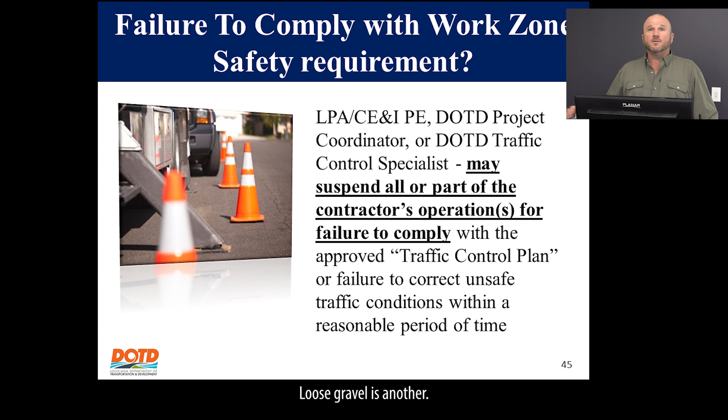Notification is given to the contractor, either verbal or written. If you give a verbal to say operations are suspended until we have a safety meeting to get our traffic control back into specification, you need to follow that up in writing, saying we're going to have a meeting on such and such day. Once we have this meeting and everybody's back on the same page, the contractor can go back to work.

Serious deficiencies are things that can be life-threatening, such as having non-crash-worthy devices. Just as an example, having a blunt end of a concrete barrier exposed to traffic inside the clear zone without the proper protection, like a water-filled attenuator on it, deserves immediate attention. That needs to be corrected before any other work operations continue, because that can cause a serious crash, fatality, or serious injury.

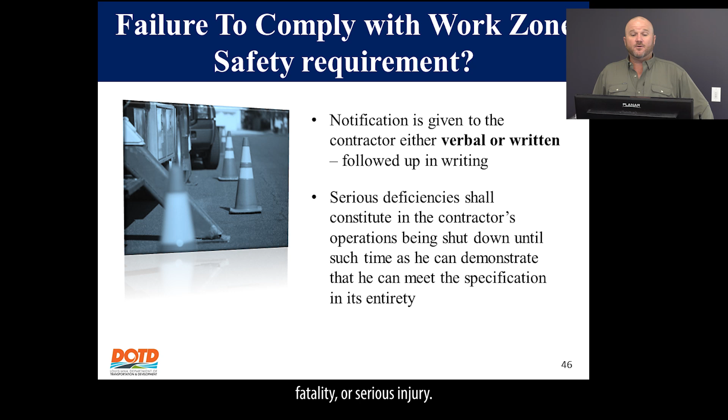If a contractor fails to comply several times, their traffic control supervisor certificate can be revoked. I need all that information in writing, how many times they were warned. I need pictures of the violations, and ATSA will pull their actual certification or training certificate. They will be removed from the DOTD database and will not have access to the diaries. ATSA will allow them to take the class one more time and pass the exam, and they will give them another certificate.

If they get decertified again, ATSA will not issue them another certificate. They will have a 90-day probationary period to verify that they're under probation, and they have to make sure everything is correct, that they're not falsifying anything, and that they're doing a lot better job than they were before when they got decertified.

Most contractors have multiple traffic control supervisors. Some of our small contractors only have one or two. If that one traffic control supervisor gets decertified and they don't have a replacement, then they can't go to work, because they have to have a traffic control supervisor for every project. So time doesn't stop for that. Most of the time, once you give them a good warning and tell them what can happen, things are usually corrected pretty quick.

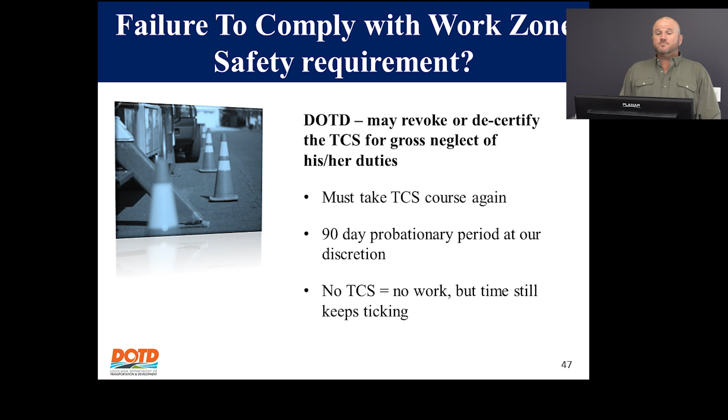A question: the traffic control diary only has to be kept up to date on a weekly basis. True or false?

The answer is false. Contractors have to do these daily. You should be inspecting them on a weekly basis. If you're having trouble getting access, email me, or you could email DOTD-SMADM@LA.gov, and we can get you read-only access to those diaries.

If that clip is not slid up and securing that sign in the stand, when it gets hit by a vehicle, that sign can come out of the stand and go through the windshield of the impacted vehicle, which is not going to be a good outcome. These things are designed so when that is clipped in and a vehicle hits it, the sign and stand shoot forward, becoming a projectile. But our signs are typically spaced at least 500 feet away from our workers, so that should not be an issue with that projectile hitting our workers.

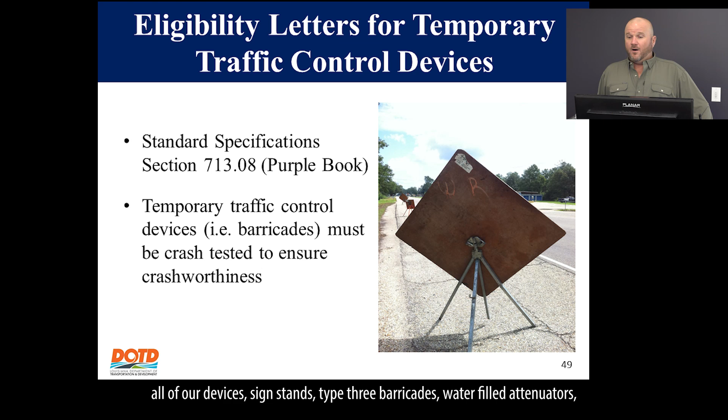Barricade warning lights have to be secured to the barricade or the drum exactly like the manufacturer calls for. All of our devices - sign stands, type 3 barricades, water-filled attenuators - they all have letters of approval, either NCHRP 350 or MASH approval letters. Those need to be turned in to the LPA or the CEI project engineer at the pre-construction meeting. Basically that's saying we're using these type 3 barricades manufactured by ABC Incorporated, they've been crash tested, here's their crash tested approval letter, and we're going to be using these throughout the project. You should have these on file to verify that all the barricades out there are this brand, this model, and are used correctly.

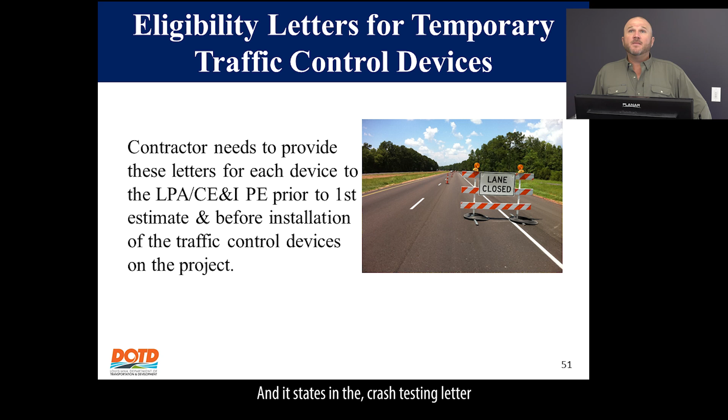You can see the picture here - the lights mounted on that barricade are mounted through that upright post. That's how they've been tested. If they mount those through that plastic panel, if a vehicle hits them, that's a battery pack - it's heavy, and it could come through and go through the windshield. That's why they have to be secured to that upright post. The sign is made of a lightweight substrate, just like the approval letter says, and the breakaway system is at the bottom. It states in the crash testing letter that if you ballast or weight these devices down, everything has to be below the breakaway point.

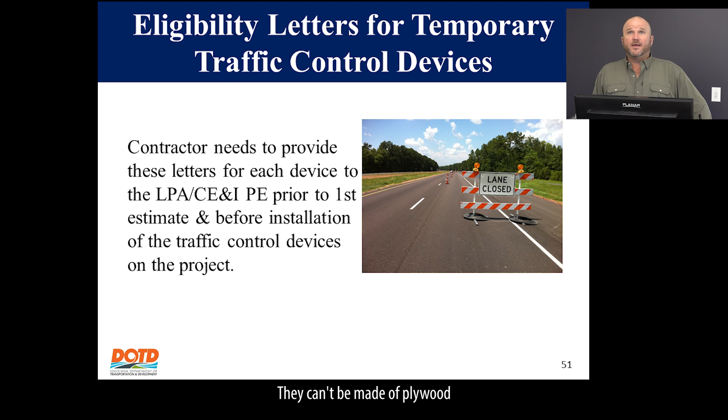So what they've done here is take these tire rings and put them below the breakaway point, so if a vehicle hits them, they break away. That's not going to affect any of the crash testing properties of this barricade. The ballast or weight, that is a hazard, and these are designed to stay on the ground if it impacts a vehicle. The barricades now have to be made of this light plastic material. They can't be made of plywood or aluminum or anything like that. They have to be made with this lightweight substrate and be accompanied by that crash testing letter.

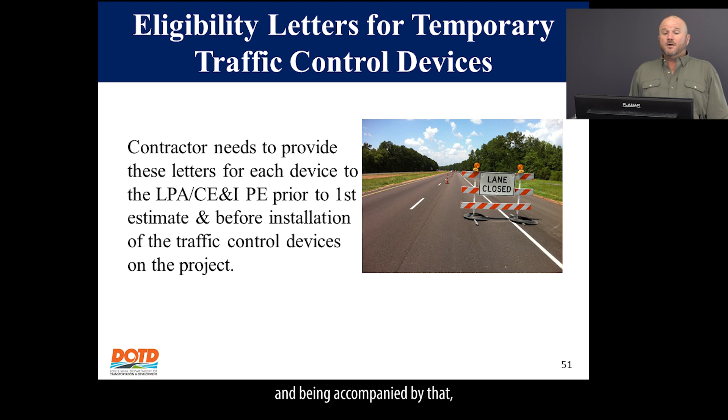So a couple different things about crash testing. We're in a bit of a transition phase. The older way we used to crash test was NCHRP 350, which is just crash testing parameters. They use smaller vehicles to crash test. Just say, for instance, if they're crash testing concrete barrier, Jersey barrier is NCHRP 350 approved, which means they take a vehicle and hit this barrier, and if it contains and redirects the vehicle, it passed NCHRP 350.

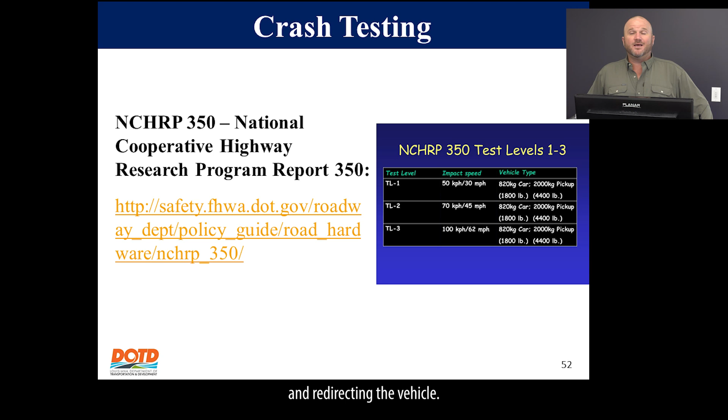As time goes on, the most predominant vehicle on the roadway now is not smaller cars, they're larger SUVs and pickup trucks with a higher center of gravity. So when you hit these Jersey barriers with these larger vehicles, they're not containing and redirecting the vehicle. So they've updated the crash testing parameters to go to MASH, the Manual for Assessing Safety Hardware, where we take a larger vehicle at a higher rate of speed and hit, just using for example, the concrete barrier. Now we have to have what we call type F barriers, which means they're sturdier, they're heavier, they're designed a little different, and they are designed to contain and redirect these larger vehicles with a higher center of gravity.

Any device manufactured after 2019 needs to meet MASH crash testing acceptance. Devices manufactured before 2019, we can continue using throughout their service life, but after they're destroyed—hole in them, cracked, whatever—they need to be taken out and cannot be repaired.

Impact angle is also another thing they crash test for. Concrete barrier, we test for a 25-degree impact angle, which is pretty steep. If someone hits that at 25 degrees, it does extensive damage. Test level 4 is all we have to meet in temporary traffic control. That's a 22,000-pound single unit truck at 50 miles an hour, or 56 miles an hour for the truck for MASH at a 15-degree impact angle. Pickup truck is going to be a 5,000-pound pickup truck at 62 miles an hour with a 25-degree impact angle.